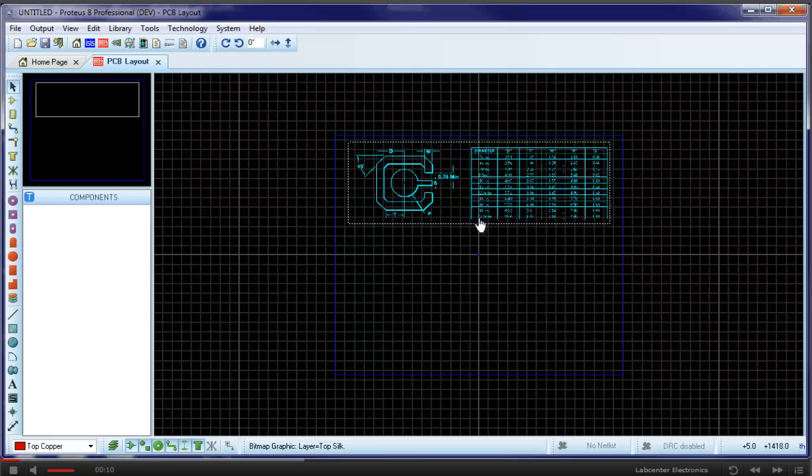This movie provides an example of how you might create a reasonably complex button pad package. We've taken a screen grab of the dimensions from the datasheet and saved as a bitmap so that we can import it into the layout for reference. We're going to make the 5mm version of the footprint defined at the top of the table. Let's start by creating the necessary pieces.

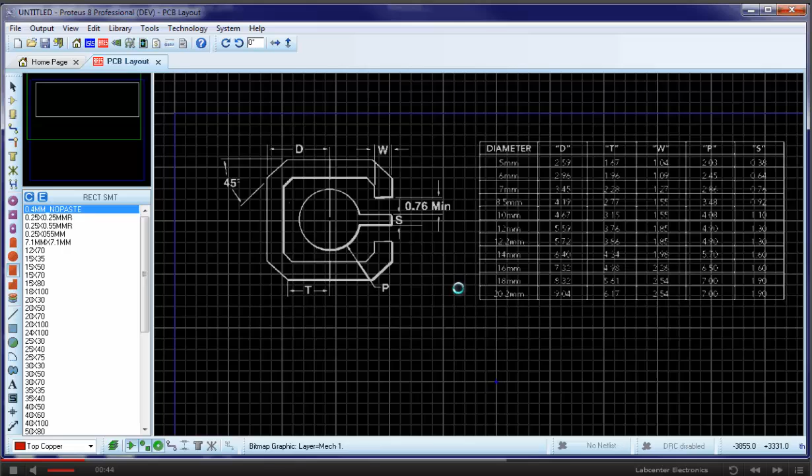We will need several pad styles, one for the ball pad in the middle, then a couple more for the terminating pads. The main difference with these styles is that we are creating them with no paste mask, as there are actually no surface mount components being placed here. It's good practice to suffix the pad styles so that this is clear. Finally, we need a 1mm track to route round the circular pad and connect the two 1mm pads.

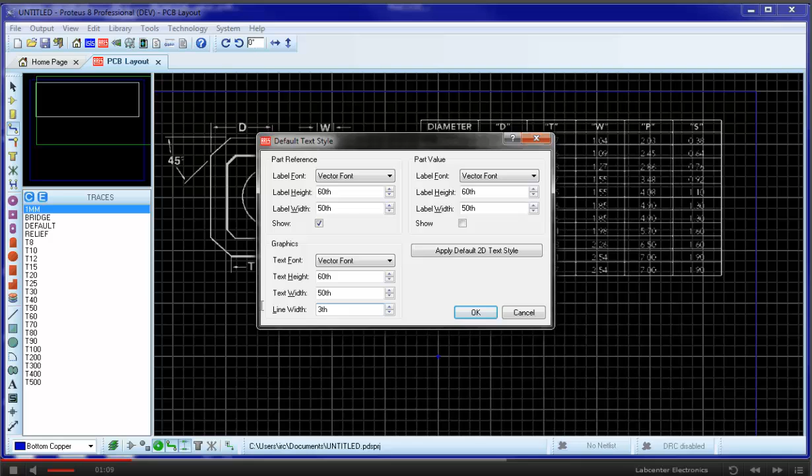Looking at the land pattern, we're going to need to draw some guidelines for positioning and routing. We'll modify the default graphic line style to be thinner and then use graphics on the mech layer as our guides. There are some fixed 45-degree angles on the track, so it will be easier for us to control with Follow Me routing switched off. Follow Me routing is ideal for tracking a board as it's more freehand and obeys design rules. In this case, however, we want to track strictly on a grid in clearly defined steps.

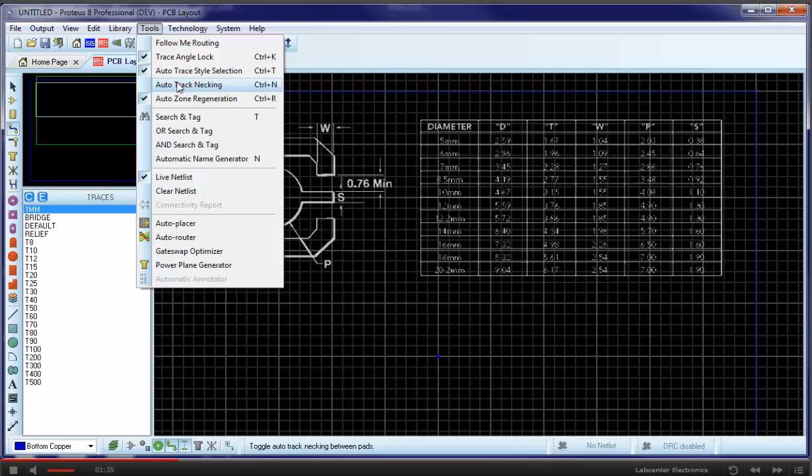Finally, we need to make sure that trace angle lock is switched on to ensure 45-degree cornering, and we should switch track necking off because we don't want to neck into the terminating pads. We'll start placement with the center ball pad and place this directly on the global origin to simplify measurements later on. Looking at the guide, we also need a 0.4mm track out to the centre of the pad. We'll create a new track style for that in the usual way, and then place the track out from the pad without worrying about the termination pad.

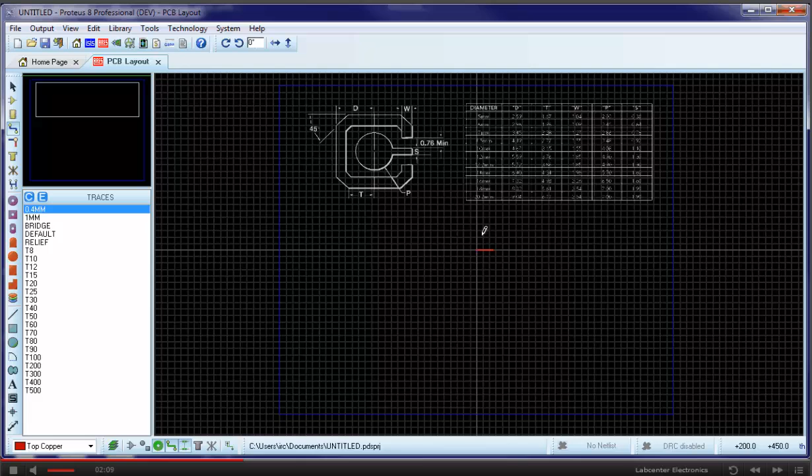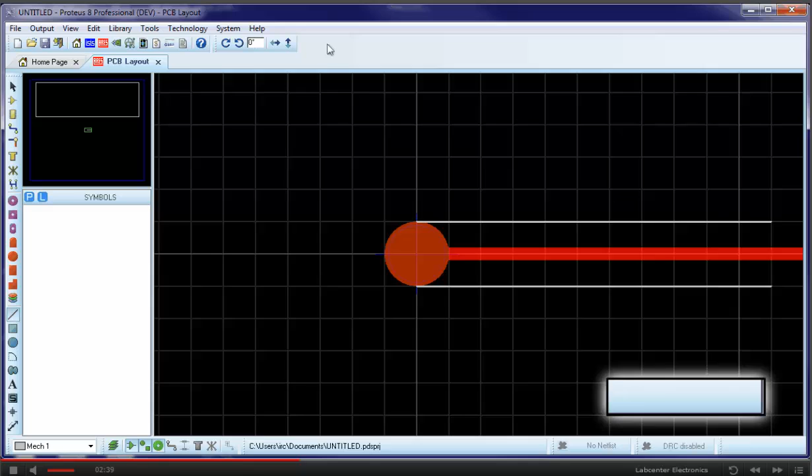Next we have to set the minimum escape clearance from the track. If we make this clearance 0.8mm and add on half the width of the placed track, that gives us vertical clearance of 1mm from our origin point. This can be shown by placing a couple of guidelines, making sure to switch the coordinate systems to metric in order to measure the distances. If it's tricky to place the line in the correct place, it probably means that the snap grid needs changing. In metric mode, the third snap level, F3 on the keyboard, is a 1mm grid that suits us perfectly. The coordinate display at the bottom right can be used to confirm placement, but with the correct snap setting it's simply one grid square from centre.

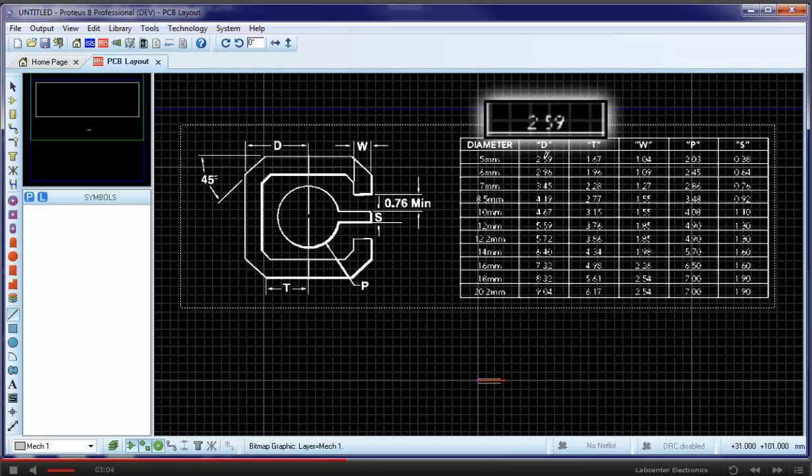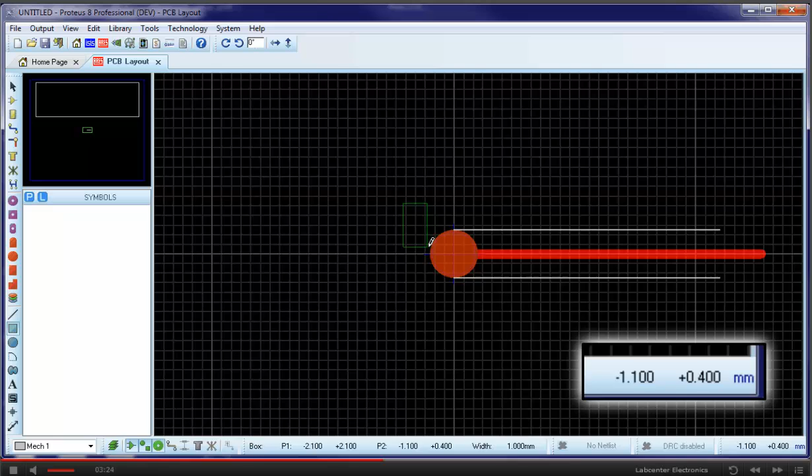Now we do a little maths to get a placement grid for the track. The trick here is to set our guidelines in the midpoint of where the track will go, as this is where the mouse position is during routing. Starting with the outside box, we can see from the D parameter that our maximum distance from origin is around 2.6mm. We need to subtract half of our trace width from that to align the guide to the desired mouse position, so we want a box 2.1mm out from the origin. For this level of granularity, we need a finer snap grid. Then using the coordinate display to guide us, we find the top left corner and drag out a box of the correct size.

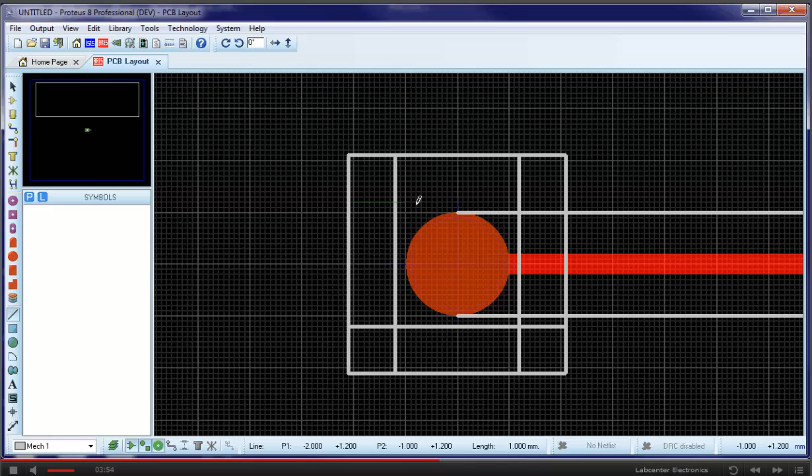Next we need some guides for the 45-degree corners. We take the T parameter at 1.7mm and again subtract half the trace width to give us a 1.2mm offset from the origin point. Again, the coordinate display will verify the position before placing, but at any reasonable zoom level, the grid display will help navigate to the right starting place.

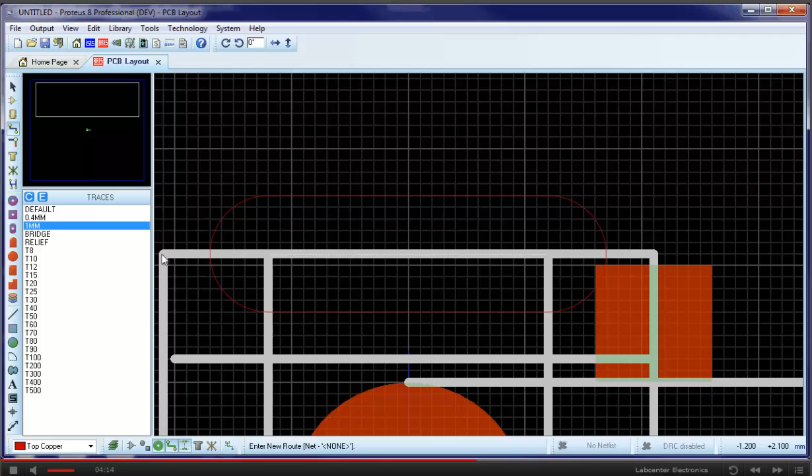Having finished the setup, we can start placing the remaining pads and tracks. Using pad mode, we place the two pads against the minimum clearance line and in the middle of the outer guidelines. Switching to track mode, we line up the mouse against the intersection of the outer guideline and the 45-degree guideline. Left click to start placement and then use the guidelines to place the track and terminate at the pad. Now we go back and complete the connection from track to top pad in the same way. Turning off auto track necking is important here to avoid necking into the pad.

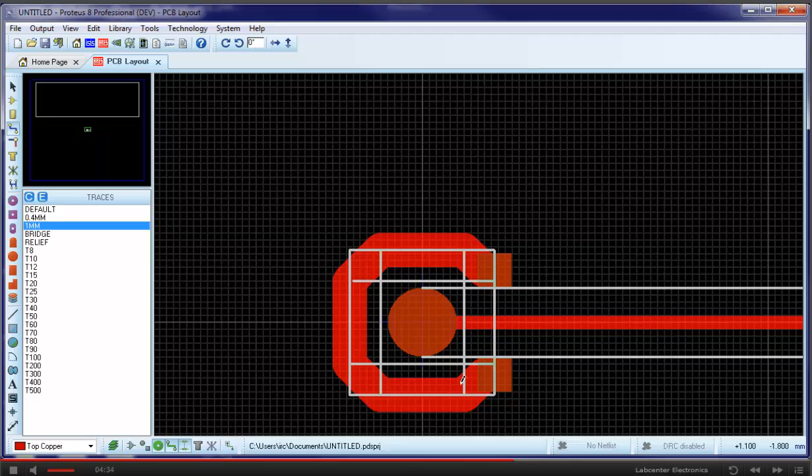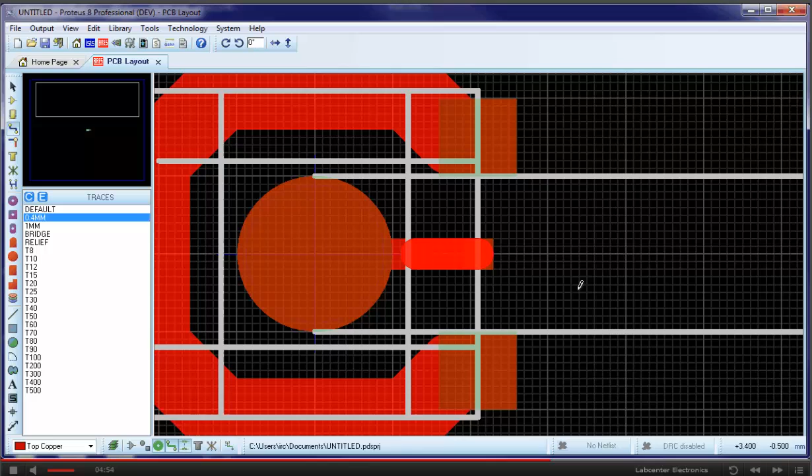To tidy up the centre track, we move it backwards, place the termination pad and route to it to make the connection. We also need to number the pads. Connected pads get the same number, in our case number 1 for the 2 ring pads and number 2 for the other 2 pads.

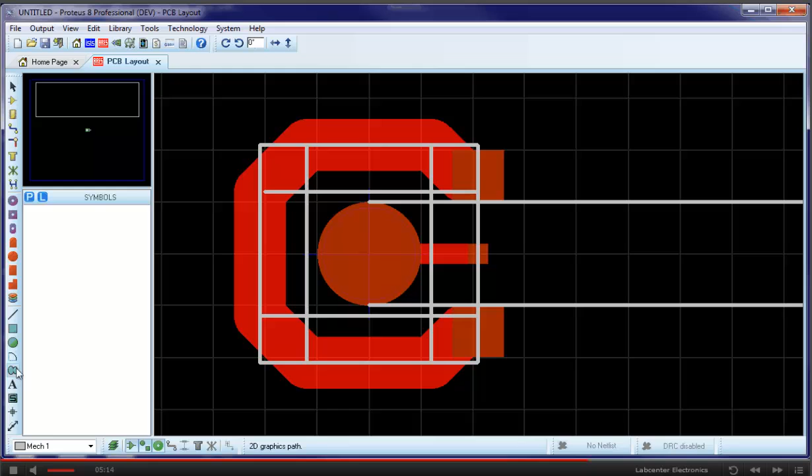The final job is to control the resist for the land pattern. We are aiming for a large escape around pretty much the whole component. We select 2D graphics path, switch the layer to the top resist, and then trace a path just outside the bounding track. When the path is complete, set the fill style to solid.

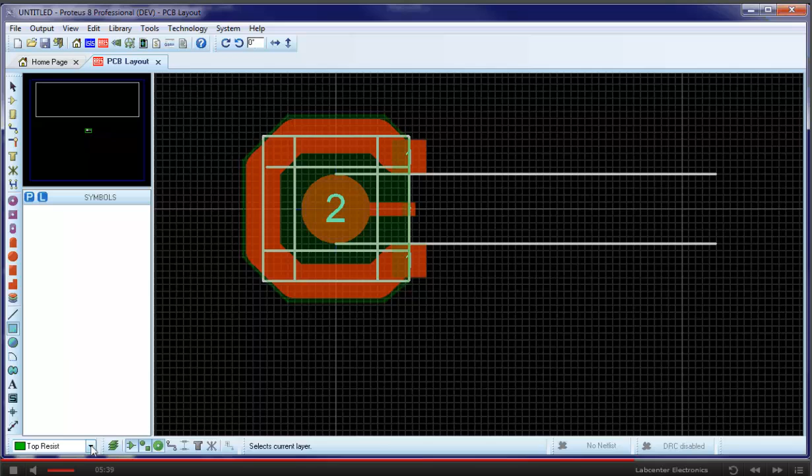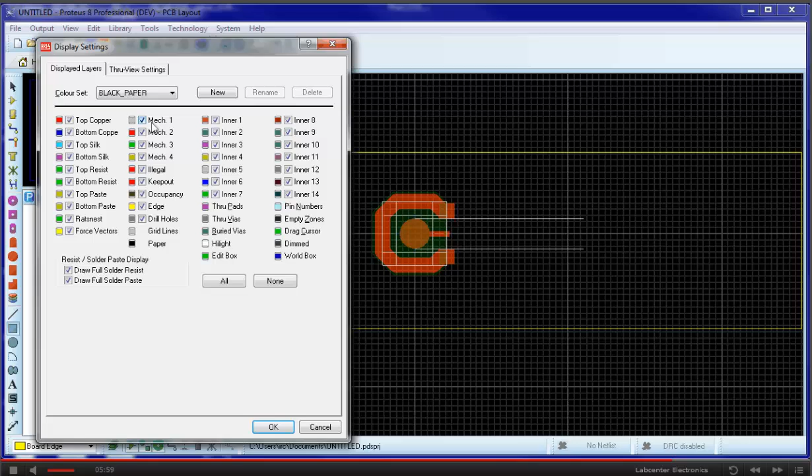The 3D viewer is a useful way to check that everything looks correct before making the part. We need to draw a board edge and then simply launch the 3D viewer from the module toolbar at the top of the application. Once satisfied that everything looks fine, we are ready to make the package. We can either delete the grid on Mech 1 or simply hide the layer before we create the part. It's important to switch to selection mode before selecting the part from Make Package and compiling the part into a library of your choice.

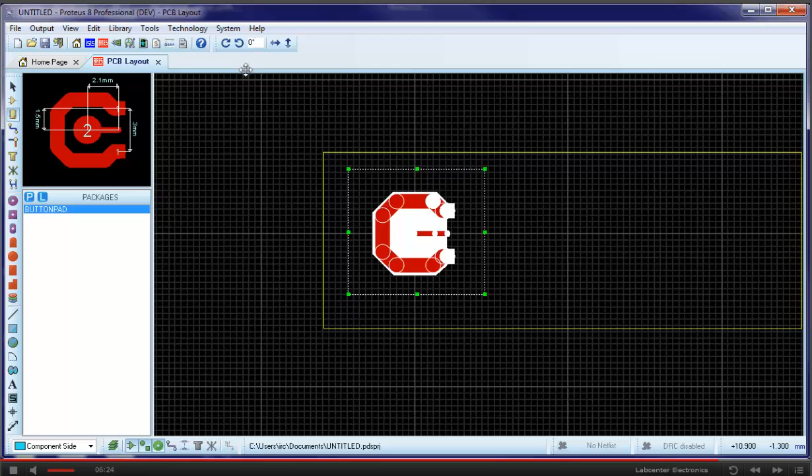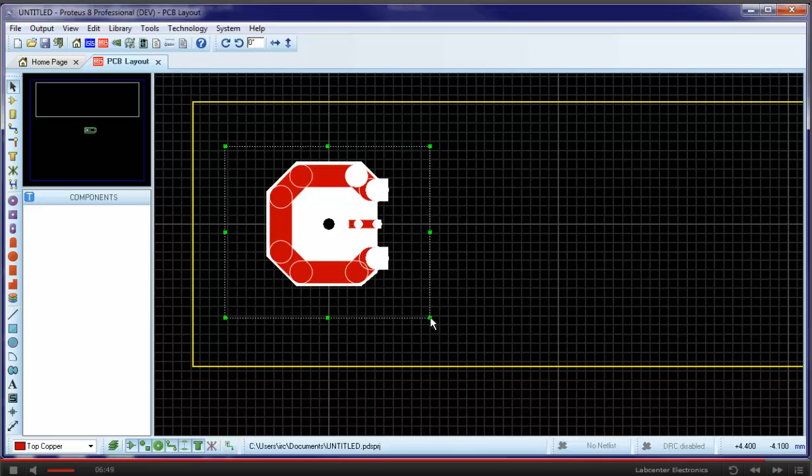It's often recommended that these land patterns allow for venting via a drilled centre. We could add this easily by dropping a via over the centre pad and then remaking the device. Depending on the manufacturer's spec, and provided a connection can be made from the other side of the board, this would actually greatly simplify the rest of the land pattern. Once we are finished, we can then delete our graphics and place the packages directly on the board. Other similar types of packages, such as finger meshes, are actually much simpler and can be created using exactly the same techniques.